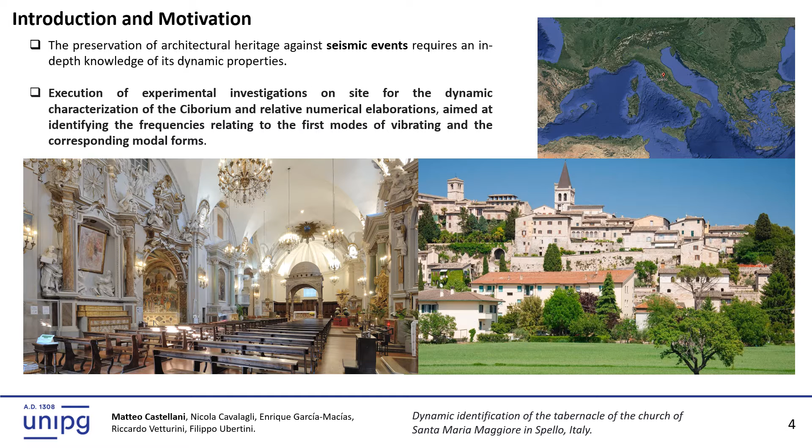The conservation of architectural heritage is a primary concern for the preservation of the cultural identity of a population and one of the tangible proofs of historical architectural development. In most cases, architectural artifacts must be protected over time from all the threats that could derive from both the variation of inherent properties, such as the aging of the constituent materials, and external actions, such as natural hazards and strong events, typically earthquakes. The preservation of architectural heritage against seismic events requires an in-depth knowledge of its dynamic properties, which can be affected also by local damages and material degradation.

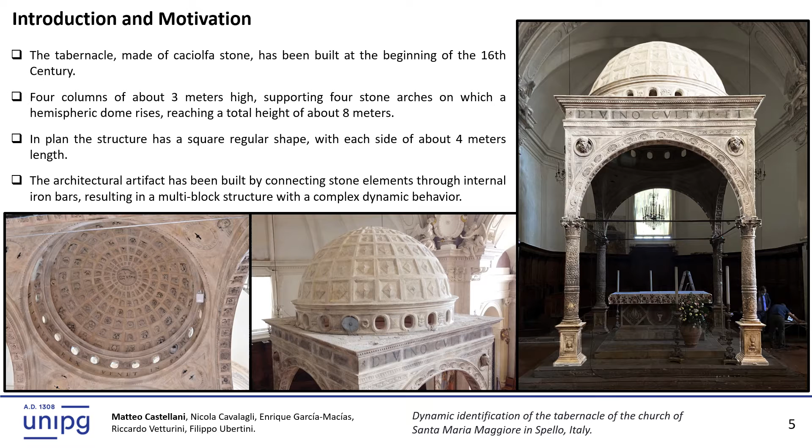The tabernacle, made of caciolfa stone, was built at the beginning of the 16th century, and it is characterized by 4 columns about 3 meters high supporting 4 stone arches on which a hemispheric dome rises, reaching a total height of about 8 meters. In plan, the structure has a regular square shape with each side about 4 meters long. The architectural artifact was built by connecting stone elements through internal iron bars, resulting in a multi-block structure with a complex dynamic behavior. The main purpose was to verify any non-linearity effects and to analyze the motion in free oscillation of a multi-block object, such as the ciborium.

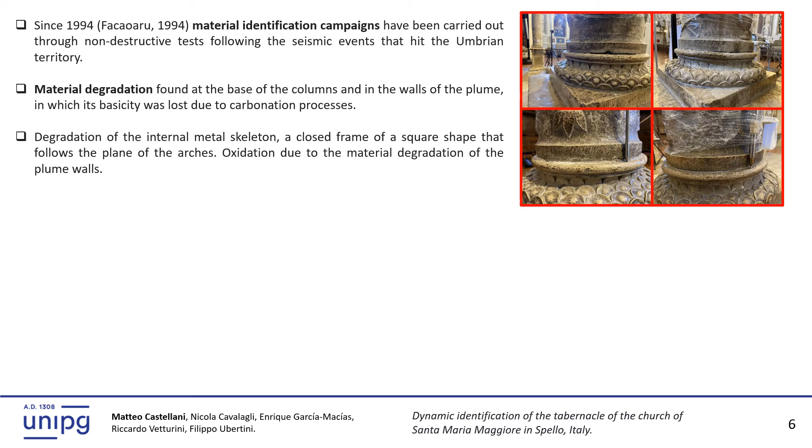An important material identification campaign was conducted in 1994 through non-destructive tests after the earthquakes that hit Umbria. Thanks to those tests, it was possible to ascertain the degradation of the material located at the base of the columns and in the walls of the plume, in which its basicity was lost due to the carbonation process. This, over time, has led to the degradation of the internal metal skeleton, a closed square frame that follows the plane of the arch, and its consequent oxidation due to the material degradation of the walls. The decay also affected the common shoulder of the west and south arch, resting on the southwest column, with cracks in north-south direction in the area between the 2 tie rods. This led to a 54% reduction of the propagation speed, which represents total damage of the stone structure.

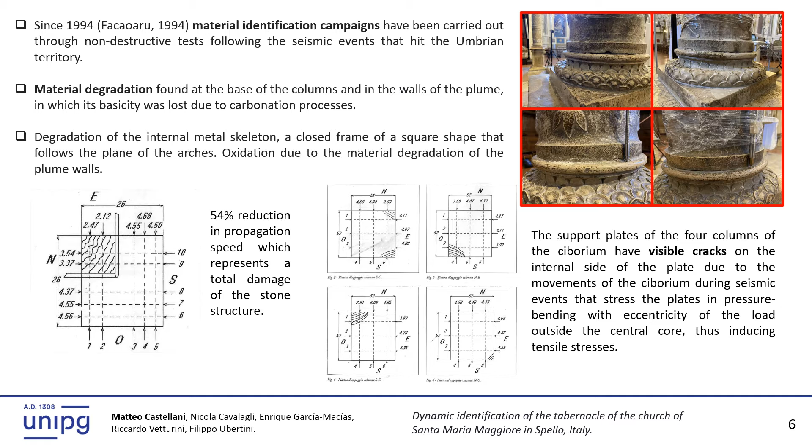The support plates of the 4 columns of the ciborium have visible cracks on the internal side of the plate due to the movement of the ciborium during seismic events that stress the plates in pressure bending with the eccentricity of the load outside the central core, thus inducing tensile stress. It was possible to observe a state of widespread decay, also located in the joints at the base of the pillars, which can alter the dynamic behavior of the structure.

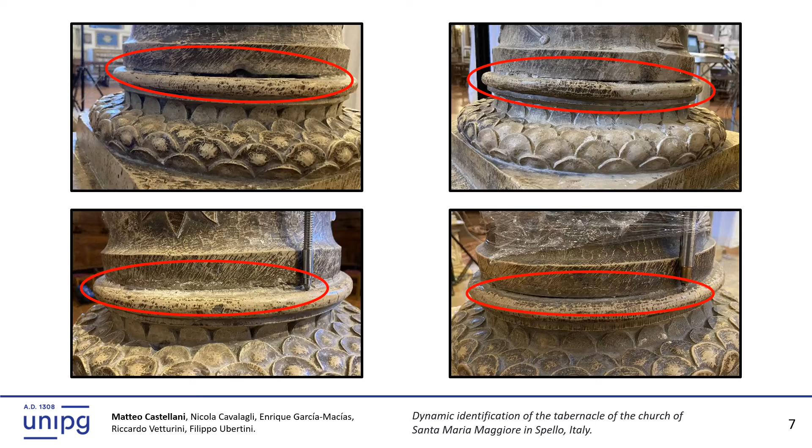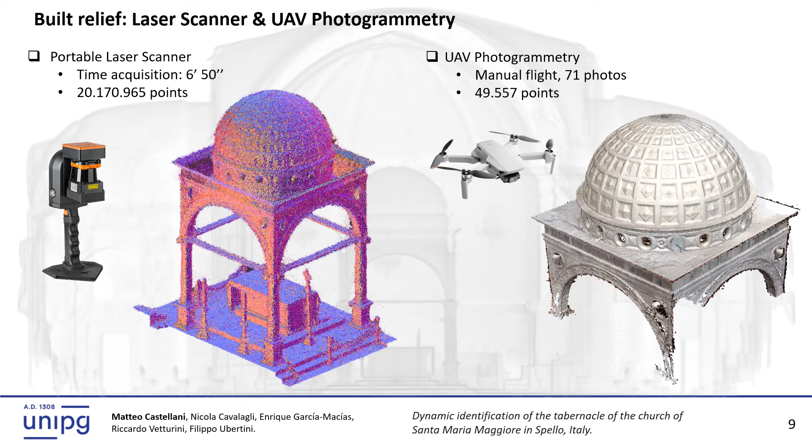An important role for the historical conservation of cultural heritage is entrusted to the three-dimensional reconstruction of the building through the innovative technique of laser scanning combined with UAV photogrammetry in extremely confined settings. With an acquisition time of 6 minutes and 50 seconds, a dense cloud of points of the structure was created, on which the dense cloud obtained with UAV photogrammetry, made using 71 photos taken in manual flight, was superimposed. The synergy between these two different methods allows us to assess with a high degree of confidence the geometry of the building, essential in the reconstruction process of a digital model, the foundation of the subsequent analysis.

The dynamic identification campaign was conducted over 2 different days with the aim of characterizing the dynamic behavior of the tabernacle and verifying the presence of any nonlinearity phenomena. High-sensitivity piezoelectric accelerometers were used, mounted on steel angles to allow a biaxial measurement configuration, for a total of 24 channels divided into 3 different setups. The 3 setups consist of 10 acceleration sensors each, 3 of which have the function of reference transducers, channels 1, 2, and 3, kept in a fixed position in the various setups. In this way, it was possible to carry out a 24-channel dynamic identification of the structure.

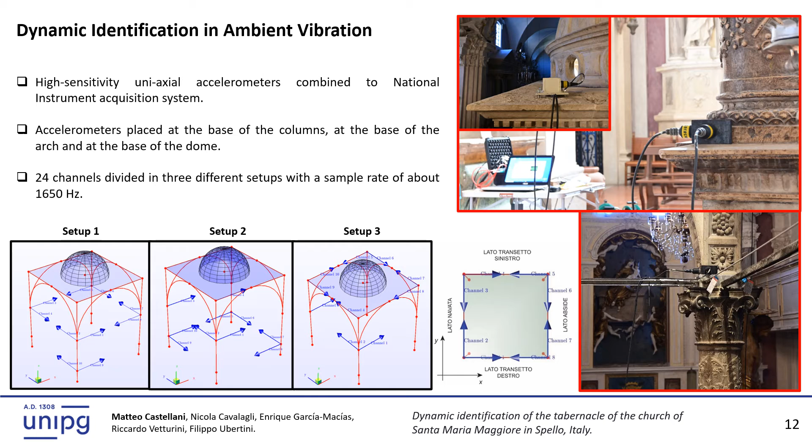The 3 instrumented levels are the base below the grafting section of the columns, the base of the arch, or the section above the capitals of the columns, and the top floor at the base of the dome. The MOVA software implemented by the research group of the Department of Civil and Environmental Engineering of the University of Perugia was used for dynamic identification.

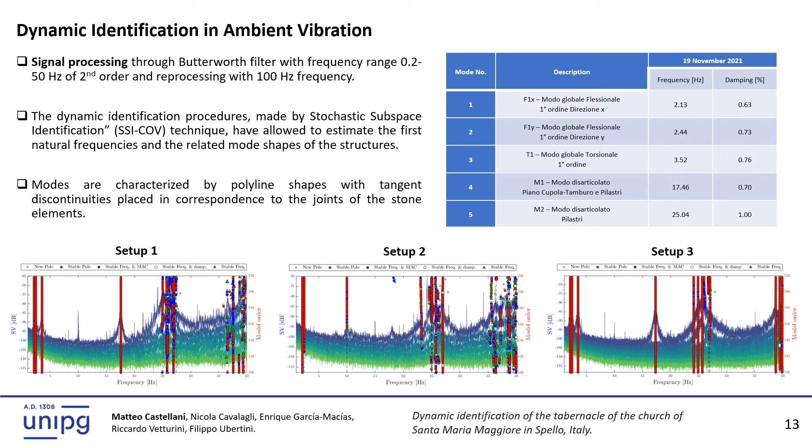The signals were pre-processed using a second-order Butterworth bandpass filter with a frequency interval of 0.2-50 Hz and resampling at a frequency of 100 Hz. The dynamic identification was performed in the time domain by means of the technique of stochastic subspace identification.

In addition to the first 3 structural global modes, consisting of the first-order bending modes and torsional direction, 2 other modes at higher frequencies of local type have clearly been identified due to the multi-connected nature of the artifact. In particular, the M1 mode involves the stone blocks of the upper part of the ciborium consisting of arch, the overlying structure, and the dome, while the M2 mode is located on the supporting pillars of the structure.

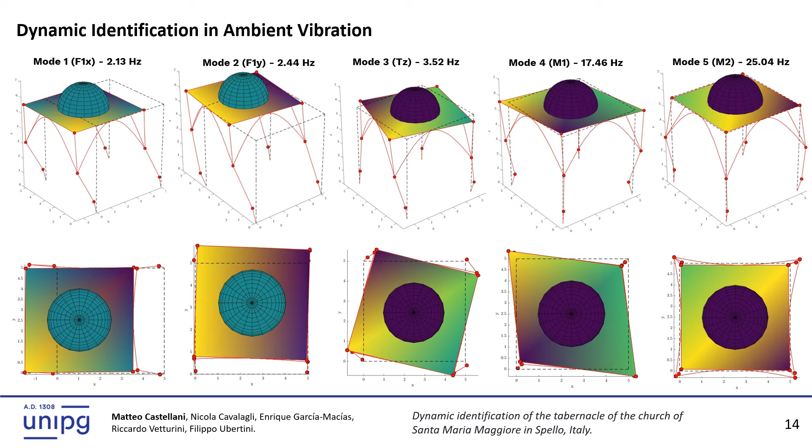The results highlight the multi-connected nature of the artifact, even in the regime of small displacement and deformation. In fact, by focusing attention on the pillars, all the modal shapes have a broken line at the joints of the columns, which is more evident in the high-frequency modes.

In addition to this, a quasi-static pulling test was carried out in which the ciborium was subjected to an increasing force applied at the height of the arch, or at the top of the columns, by means of a rope. The purpose of the test was to verify any nonlinearity effects and analyze the motion in free oscillation in terms of oscillation frequencies and amplitude of displacements.

The instrumentation used consists of a strain gauge load cell for measuring the pull in the rope and displacement transducers for measuring displacement in specific points considered of particular interest, as indicated in the diagram below. In particular, the pull was applied at a distance of about 6 meters and a height from the ground of about 1.50 meters, so that the effective part of the applied force was calculated as the horizontal component of a vector inclined about 15 degrees on the horizontal.

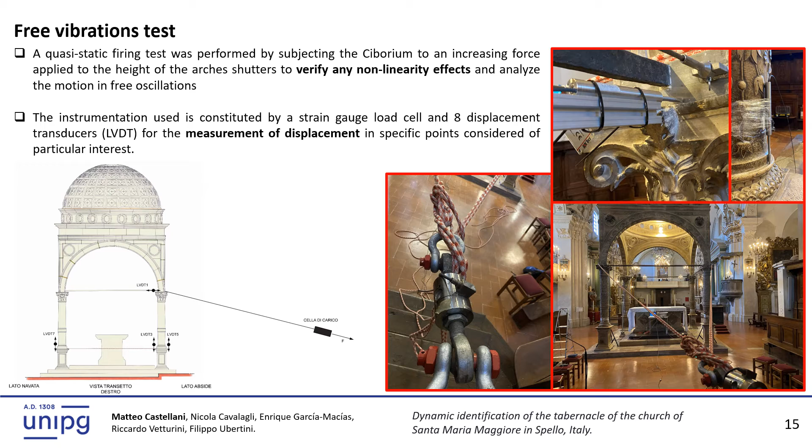The displacement transducers have been positioned both at the top of the columns, that is, near the point of application of the load, and at the base of the 4 columns, in correspondence with the joints with their respective bases, possible site of rocking motion due to the formation of localized hinges.

The graphs below show the force-displacement equilibrium diagrams obtained from 2 different pulling tests. In particular, the horizontal displacement data obtained from sensor 1 and sensor 2 are compared with the vertical data relating to the sensors placed at the base of the columns, sensor 5 and 8, indicative of the opening-closing of the hinge.

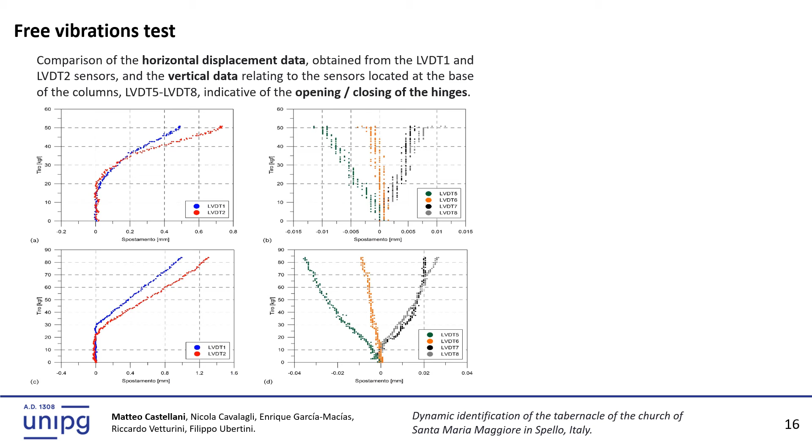The graphs show how the two measures of horizontal displacement are consistent with each other, taking into account the levels of uncertainty present both in the symmetry of the stiffness of the structure and in the direction of the applied pull. Similarly, the opening and closing measurement of the hinge can also be considered consistent except for the measurement point relating to sensor 6, which locally has a lower level of degradation than the others.

A rigid motion kinematics is therefore hypothesized as illustrated in the present figure, in which the displacements are condensed exclusively in the base and top joints of the columns, and the rotation is activated around a hinge placed in the center of the section. It can be deduced that the dynamics of the artifact is characterized by the presence of further localization of deformation, in addition to the one found at the deformation of the constituent material.

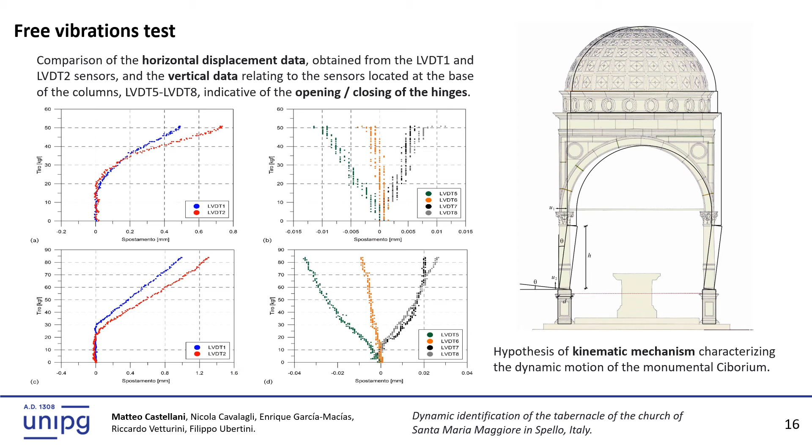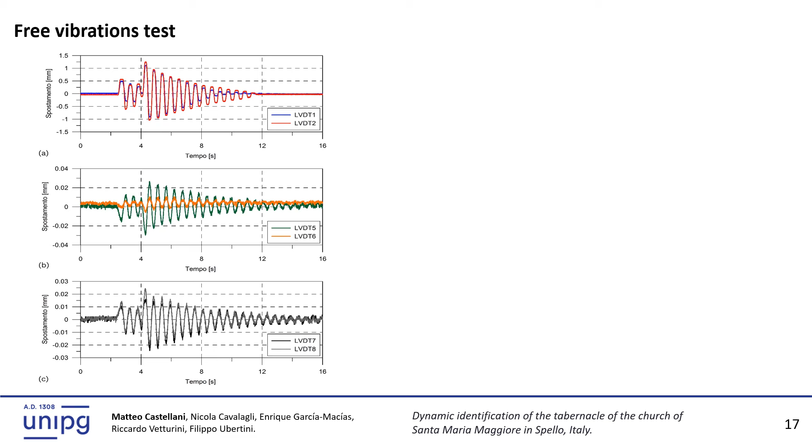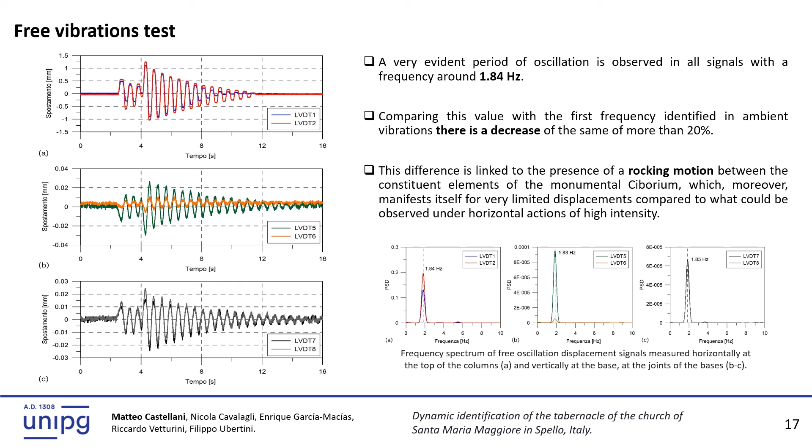Comparing this value with the first frequency identified in ambient vibration, which corresponds to a flexural mode consistent with the motion imposed in free oscillation, a decrease of more than 20% is noted. On the basis of the measurements performed, it can be deduced that this difference is linked to the presence of a rocking motion between the constituent elements of the monumental ciborium, which, moreover, is manifest at very limited displacements compared to what could be observed under horizontal action of high intensity.

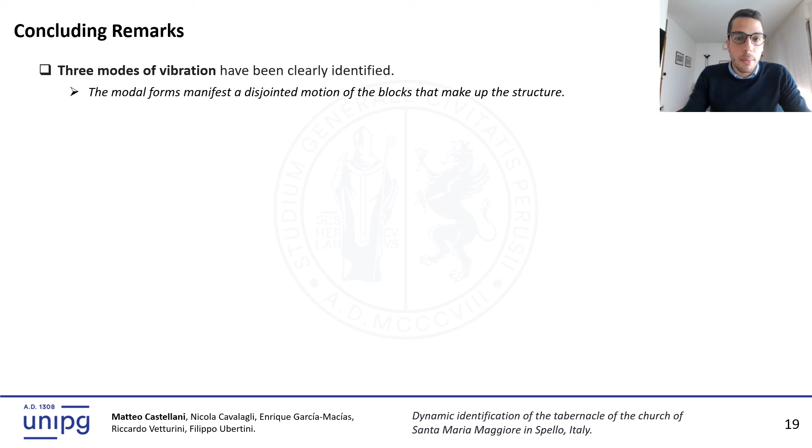Finally, let's finish this presentation with some concluding remarks. Three modes of vibration have been clearly identified, the first two of the flexural type, along the directions parallel and orthogonal to the axis, respectively, and the third torsional. The modal forms manifest a disjoint motion of the blocks that make up the structure.

The free oscillation test highlighted the presence of a localized rotation motion of the columns around the connection joint. This motion is characterized by an oscillation frequency lower than that identified by the identification test in ambient vibration by over 20%. The structure under investigation is characterized by non-linear dynamic properties, the characteristics of which are manifested even in the presence of small displacement.

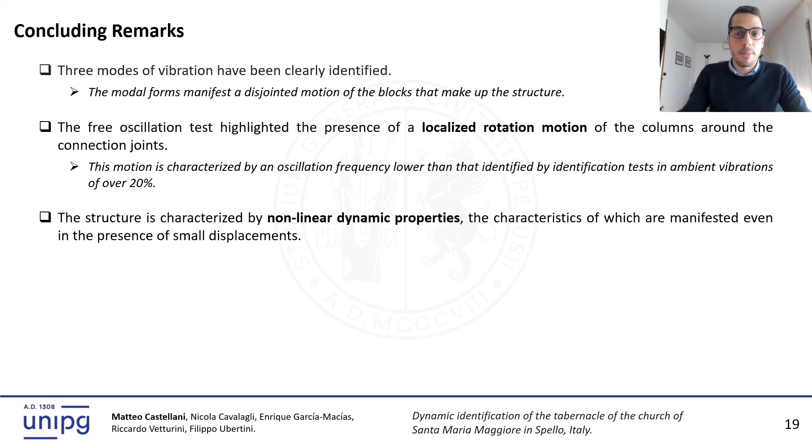The results, also strengthened by the outcomes of different non-destructive tests carried out about 20 years ago on the constituent materials, which emphasized the degradation state of the stone material corresponding to the most stressed areas of the joints, have highlighted the crucial role of diagnosis with a multidisciplinary approach in order to achieve proper intervention decisions in respect of the cultural heritage.